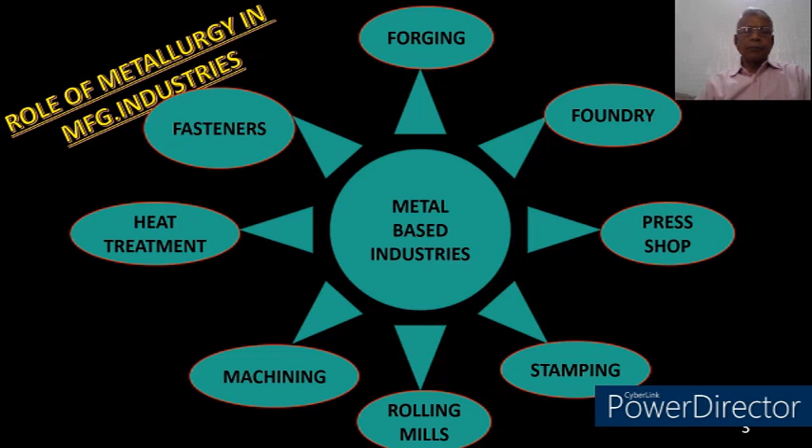But generally, these are the basic industries which are metal based and where metal is being used for manufacturing any product. So while running this type of business or industry, what problems or issues does the owner, GM, or plant head face day-to-day? I will give you a glimpse of that.

First one is low production. These are the various issues faced by any organization in general: low production, administrative and others like legal issues, union issues and all those things. Then high internal rejections, then parts failure at user's end, customer complaints, high production cost, quality issues, and poor customer base. So these are the various problems or issues in general in all metal-based industries, being faced by most plant heads, owners or GMs of a plant while running that particular plant.

So out of this, I have selected a few where metallurgy plays a greater role, because my title is Role of Metallurgy in Manufacturing Industry. So let's see what are those.

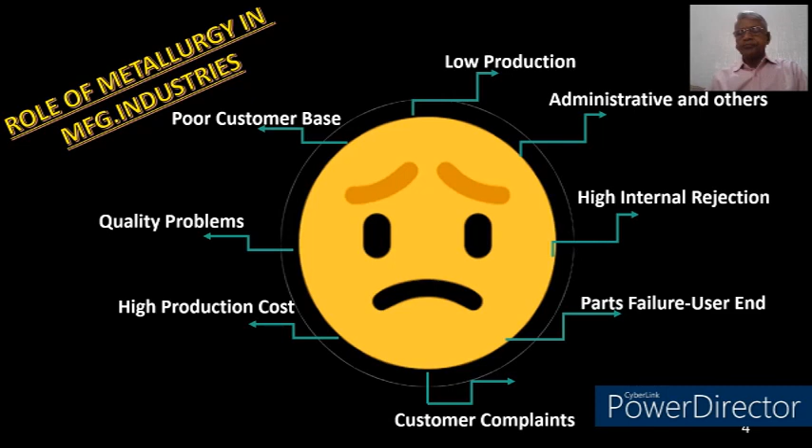One is customer complaint, high production cost, quality problems, and part failure at user's end.

You may ask, what is the difference between a complaint from the customer and a complaint from the end user? So let me differentiate this.

Suppose you are in a forging plant or a foundry plant, and you are supplying your final product, like forging, to your immediate customer, like a four-wheeler unit, tractor manufacturing unit, or two-wheeler unit. So that becomes your immediate customer. But the end user is the one who is using your part, like a farmer in case of a tractor, a passenger for a passenger car, or a motorcycle rider for a motorcycle. So all these are end users.

So this I have differentiated: customer complaint is from your immediate customer, and part failure at user's end is from the one who uses the total assembly where your part is also assembled. So coming back to the point: customer complaint, high production cost, quality problems, and part failure. These are the various areas where metallurgy plays a bigger role. Let's see how.

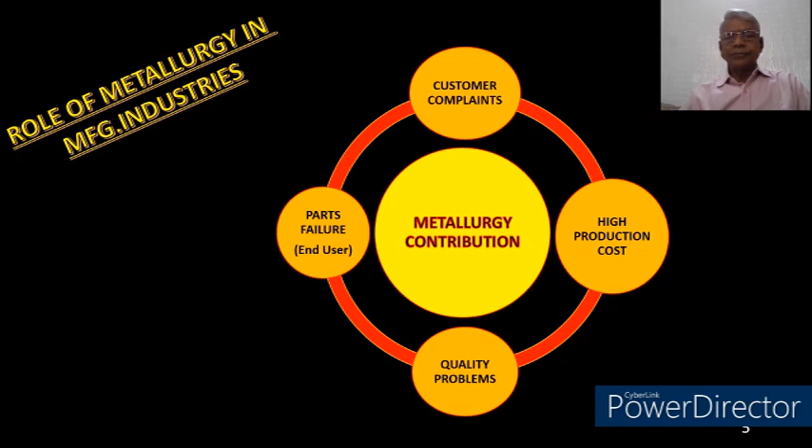First of all, customer complaints. Customer complaints are generally of two types: dimensional and metallurgical. I am not going to touch upon the dimensional; I will be touching only on metallurgical, because my topic is related to metallurgy only. So I will deal with this only.

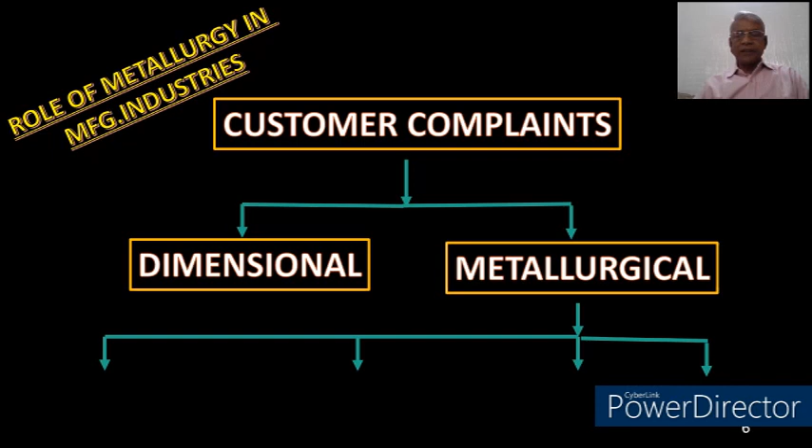So what are the various customer complaints related to metallurgy? Let's see: chemical composition, mechanical properties, microstructure, and breakage.

In general, the customer complains about any mix-up at their end regarding whatever you have supplied. There could be a mix-up between EN8 or maybe carburizing grade of steel. So that is a general customer complaint which comes from the customer.

Then mechanical properties, like hardness, tensile strength, or impact properties if specified. If there is something wrong with whatever you have supplied, then the customer complaint comes.

Then microstructure: if your heat treatment is not proper, if your hardening and tempering is not proper, you may get some mixed structure, or instead of hardened-tempered, you get some normalized structure. So that type of problem in microstructure is basically because of heat treatment problems.

And the last one is breakage. In case of breakage, wherever you are supplying your part, if it goes to the assembly shop and fails there, that becomes a breakage at your immediate customer's end. So these are the various issues which come from your customer.

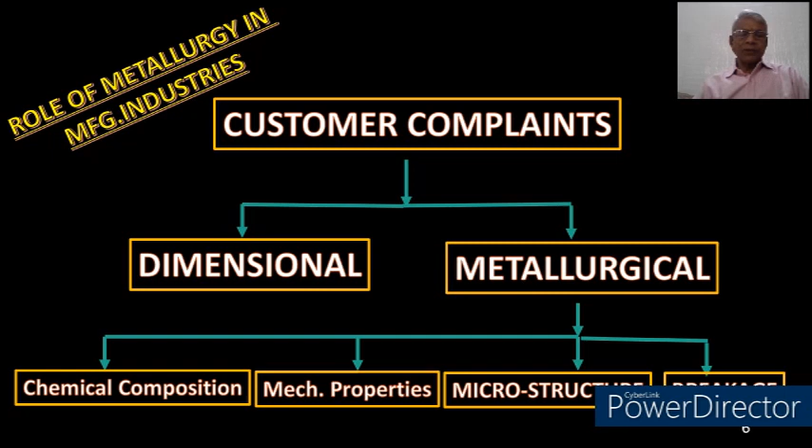So how does metallurgy contribute?

So, customer complaint. What are the solutions? The first and foremost solution is your raw material sourcing from the prime source or prime producers. This is one of the basic reasons. See, if you control your initial input, then I can assure you that 75% of your product will be okay as far as final product quality is concerned.

Of course, you have to maintain process parameters, but this is one of the prime reasons where failures occur, where you cannot achieve the desired property after doing all heat treatment and everything, but you lack somewhere. And there is a customer complaint to you that this product is not having a good microstructure or good hardness or anything related to metallurgy. So this you have to maintain. You have to buy material from prime producers.

Suppose I am taking the case of a forging industry, because I generally belong to forging as well as tractor industry. So I'll give examples from forging and tractor based industries. In that particular case, if you have taken billets or bars from a trader or somewhere, there could be a chance of mix-up because they don't keep their material with proper heat identified or even grade identified. So all those problems are there if you are buying from a trader. So you must buy from a prime source, prime steel producers.

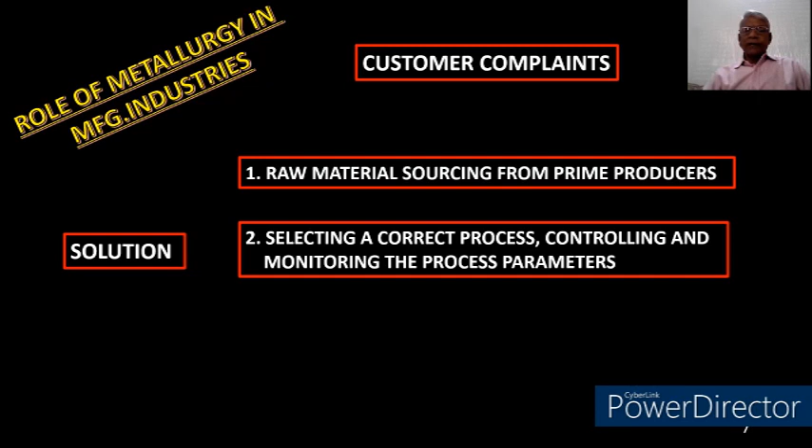Then controlling that particular process's parameters and also monitoring the process parameters. So these things are required while you are processing the material. After selecting the correct raw material, when you process it, these things have to be maintained.

Then the third is verifying the final product parameters before dispatch. Whatever quantity you are dispatching to your immediate customer, you must verify before dispatch that whatever you are sending is okay or not. For that, a quality audit is performed. Out of some lot, you take 5, 10 pieces or maybe 5%, 10% of pieces, check for hardness, check 1 or 2 pieces for micro and all those things, just to verify that your final product is okay or not.

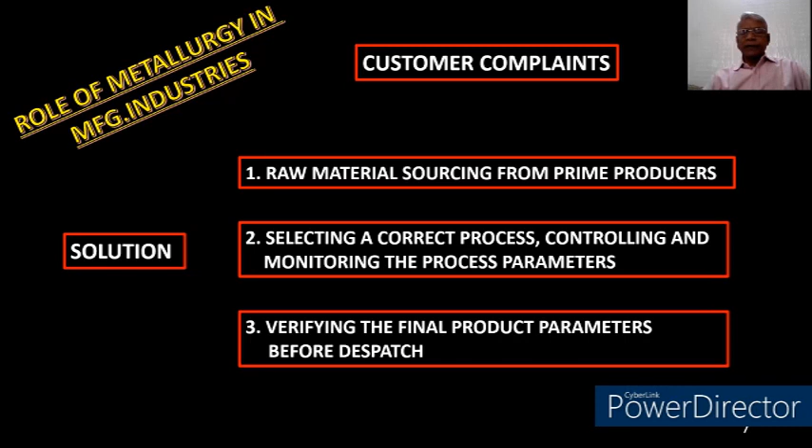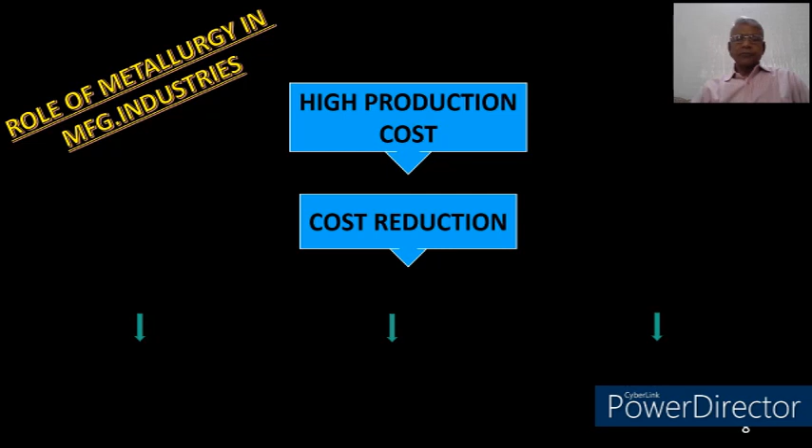So if you maintain these things, I am sure that you will minimize your customer complaints. This is one of the solutions where metallurgy plays a great role. Now I come to the second point. That point is high production cost. So how does metallurgy help in cost reduction? First of all, process modification. By modifying a process, you can also reduce the total overall cost.

For example, there are cases where people were using carburizing, but without compromising on the final property, they have shifted to induction hardening. Carburizing, maybe pack carburizing, any carburizing generally takes 10 to 12 hours to attain a particular depth, while in the case of induction hardening, it takes only a few minutes to get that particular case depth. And the production is very fast. Within an hour you can produce thousands of components, whereas in this case the quantity is very limited and the process cycle is very long. So by using this, you can reduce the overall cost of your product.

Then the other example could be forgings to PM parts. These PM parts means powder metallurgy parts, also called sintered parts. These are becoming very popular nowadays, because in forging, once you load the die, you produce hardly 3 to 4,000 components in a particular die run, depending upon the part shape and conditions.

Okay, but in case of powder metallurgy, you produce the finished good in almost finished condition, and the quantity goes to around 50,000, 60,000, maybe in some cases. If the job is small, it can go up to lakhs in one die run. Okay. So that is the advantage of going for it, but you have to confirm that the part parameters or product qualities are matching with forging, whatever is required by your end customers. Okay, that has to be confirmed.

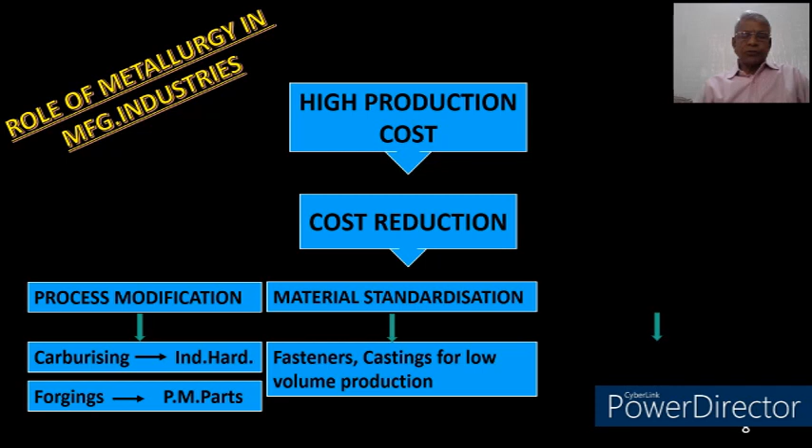So in that particular case, some of the cases are like fasteners. In one of the tractor manufacturing industries, this particular project was taken, wherein all the fasteners information was collected, and they were trying to commonalize, whether in terms of material grade or in terms of dimensional parameters. By adjusting 1 or 2 parameters, they could commonalize most of the fasteners, thereby reducing the procurement cost. Okay, so that also helps in reducing cost.

Similarly, for castings also, where the overall quantity requirement is very less, maybe you are producing a product, maybe 10 pieces or 100 pieces in 5 or 6 months. So quantity is very less, and for that you will need castings of different grades, very small quantity. So in that case, you can commonalize one casting. Maybe grey iron casting can be replaced with SG iron, though it will be slightly costly. But if you go as far as overall procurement cost, maybe it will be cheaper also.

So it will reduce, first of all, your inventory problem also, keeping different grades at different places, wherein you can keep one grade at one place only. So overall, there will be a cost saving if you standardize a material. Okay. Then the third comes material substitution. If you substitute a material, that also will reduce your overall production cost.

For example, from SAE 8620 to 20MnCr5. This was done by most of the automotive industries earlier. They were using 8620, which has nickel, moly, and chromium. Now they shifted to 20MnCr, which has only chromium as alloying element. So this becomes cheaper as compared to 8620, though the final product parameters or product quality remain the same, whether it is hardness, whether it is case depth and everything, that remains same.

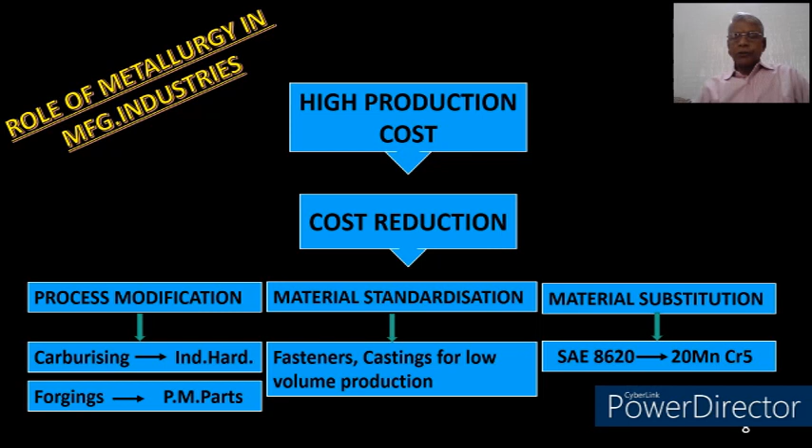But the raw material cost from 8620 to this is quite less. Okay, so in that case, you also reduce the overall cost. So by substituting a material, you can reduce the cost also. Then comes quality. In quality, the overall quality, whatever you are supplying to your immediate customer, how it has to be maintained and where metallurgy contributes.

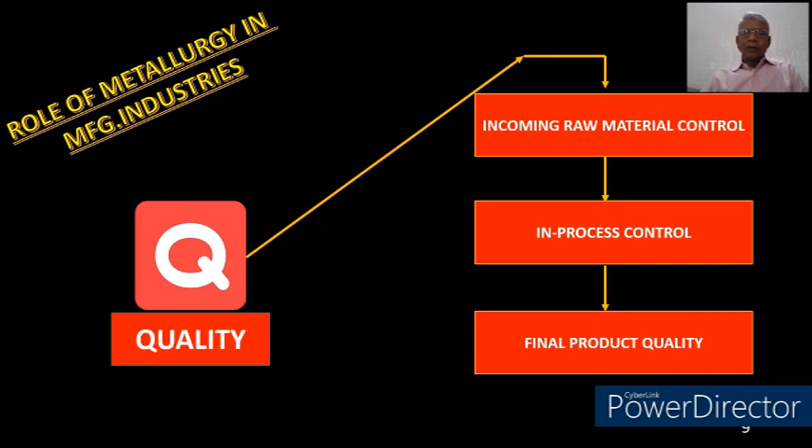Like in the beginning I told you, incoming raw material control is very much required. Okay. Then in-process control, and the last one is final product quality. If I go one by one, how you can maintain the quality, then let's go for incoming raw material. I'll talk about forging. So in case of forging, these are the various parameters which need to be checked at the initial stage when you are receiving a raw material: chemistry or grade of the steel, internal soundness, inclusion rating, grain size, forgeability, geometry, hardenability, step down test, dimensions and shape.

So these things are required when you receive a material from a standard supplier. This is what I am telling, that if you buy this material from a reputed source, a standard source, these problems will be less as compared to buying a raw material from a trader. Okay. So try to avoid raw material from traders or any unknown sources, because you will face a lot of problems while processing that particular material and you will not maintain the quality required.

Now the second is in-process control. In in-process control, again I am going with reference to this forging industry. Raw material cutting: here also you have to control feeding speed, raw material cutting speed. Okay, then you have to control the sizes also; sometimes different grades of material are of the same size. Okay, so here also during raw material cutting, you have to identify the material so that there is no mix-up at the cutting stage.

Okay, so this control is also required. In the forging operation, again, the forging heating temperature of the billets, then the forging operation itself, how many strokes are to be made, that has to be checked, along with the particular dies and everything. Die shapes, die cavities and everything has to be maintained in the forging operation also.

And when it comes to the final product after forging, we have to check the forging defects also: laps, dents and all those things, or cracks. So those things need to be controlled during the forging operation. So this is process control during forging.

And again in heat treatment, basically three things: what temperature you are heating it to, what heat treatment you are giving at what temperature, whatever the soaking time is depending upon the part thickness, and then how you are cooling the object, whether it is normalizing, annealing, or even surface hardening treatment like carburizing or induction hardening. So all these process parameters are required to be controlled during processing of that particular part.

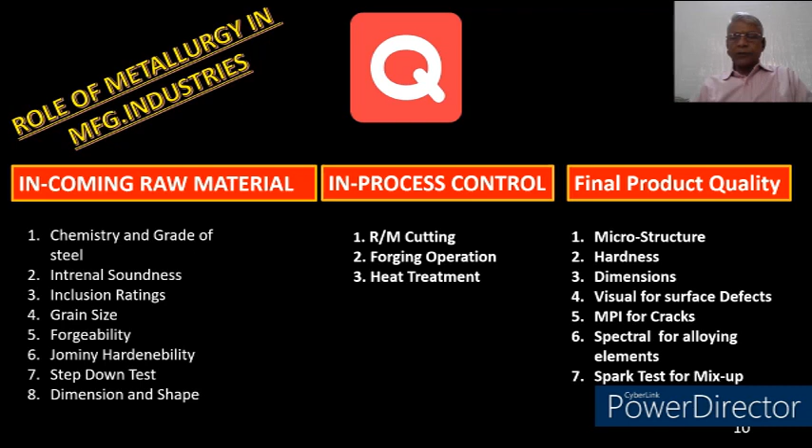Then I go to the third, that is final product quality, meaning whatever has been done, how you control your final product quality. This is again an example from forging. You check a few pieces of the lot prior to dispatch. Microstructure, one or two pieces you check as a sample. Hardness you can check 5 to 10% because it's non-destructive. Dimensions also you can check 5 to 10%.

Visual inspection for your surface defects, whether cracks or forging defects are there or not. Or MPI for surface and subsurface cracks. Nowadays this is very common for all forgings which are hardened and tempered, and even in finished products MPI is done for cracks. Then spectral testing and spark testing are done. Spectral is for alloying elements.

In that case, there is pedestal-type spectral testing, where you take 5 or 10 pieces out of the lot to be dispatched and check for alloying elements, whether it is alloy steel or plain carbon steel. By spark testing you can also check lot mix-up. If there is a low carbon with high carbon mix-up, you can verify that with a spark test. This is just before your final dispatch, so it's also called a quality audit, where you audit the lot before it is dispatched.

So if you maintain these things, I'm sure the quality of your product will definitely be maintained, and you will have fewer problems in the quality of the product. Okay.

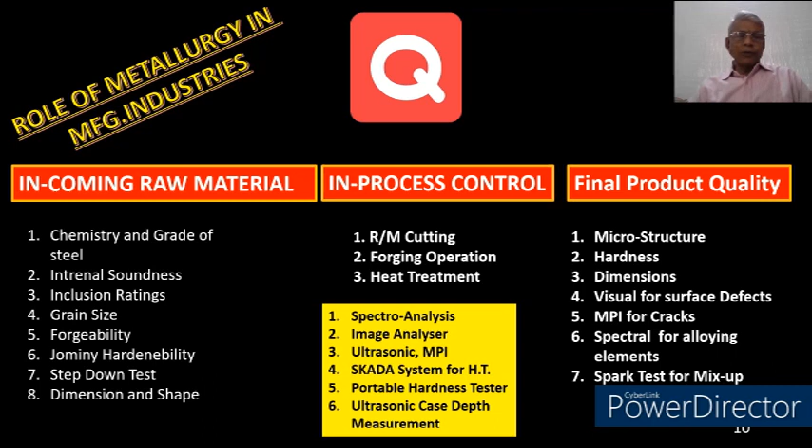These are some of the things nowadays that are very useful for metallurgical analysis, like the spectrometer. It is for chemical analysis, very fast and accurate. Image analyzers for inclusion rating, grain size, microstructure and all those things. Nowadays people use image analyzers because they give a quantitative figure. In our days, we used to check it and it was a qualitative analysis.

But now, because of recent developments and software, you can quantify it, and there won't be any confusion between a sulfide and a silicate inclusion, which was there earlier. It was very difficult to identify a sulfide and a silicate inclusion in steel. But nowadays, with an image analyzer, you can differentiate them and get the quantification also. Earlier, we used to compare with the standard JK charts.

Now you come to ultrasonics. These are also available. Ultrasonics, again, is all NDT, and nowadays so many instruments are coming, even ultrasonically based hardness testers. So ultrasonic crack detectors as well as hardness testers have come up, very useful portable hardness testers. And MPI, as I discussed here.

Then SCADA systems for heat treatment. Portable hardness testers, again ultrasonically based. And there are Leeb hardness testers also, impact-type hardness testers, which are also portable and non-destructive. Then nowadays ultrasonic case depth measurement has also come up. You don't have to cut the piece to check the case depth; you can measure it without destroying the piece.

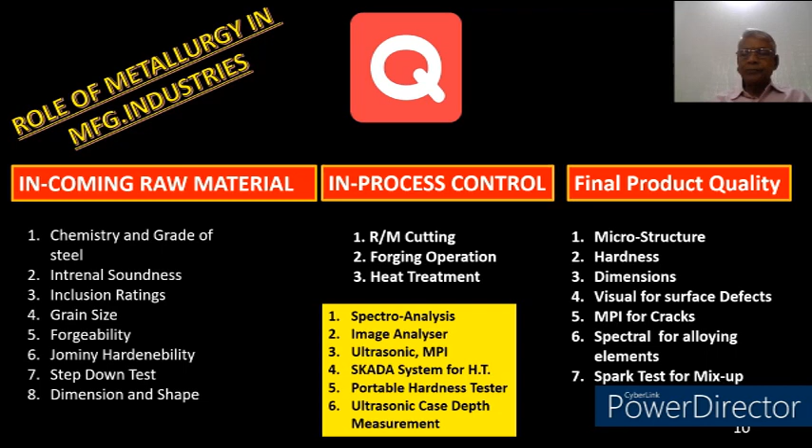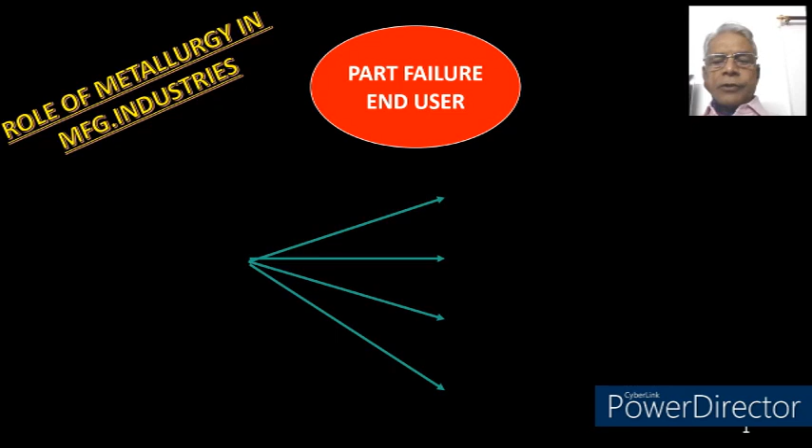Now coming back to the fourth point, that is part failure at end users or at user end. So where metallurgy can contribute. So let us see. First of all, what are the possible reasons of part failures at user end? It could be design related. Maybe the design is not correct. Fillet radius, fitment errors, and all those things are there. So in that case, there could be a design error.

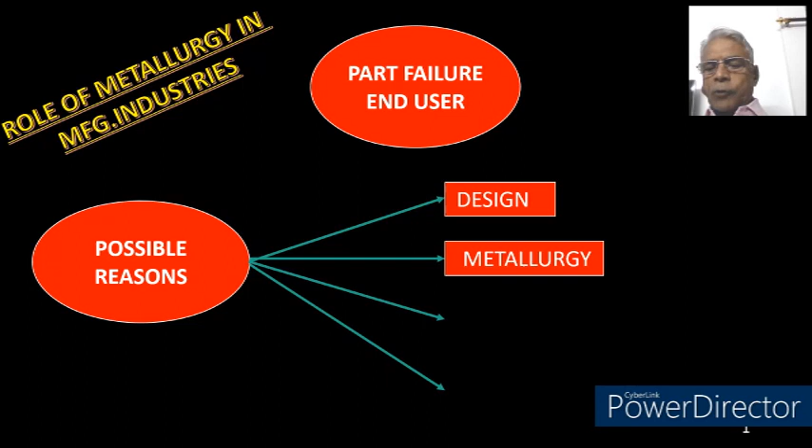Then metallurgy, again, all those metallurgical parameters like selection of material, mechanical properties, microstructures, all these things may not be up to the requirement. Okay. Third is assembly fault. During assembly, there could be a misalignment of components, or there could be over tightening of studs and nuts and bolts. That could also cause a failure in field.

And the last one is service abuse. It is not being used for the particular purpose it has been made for; it has been overused or overstressed. Like you take the case of tractor, it's made for field application, but people are using it as a transport medium also, with a lot of overloading on the tractor itself, on their trolleys and other things. So that causes an overloading on the entire system, and it may result in a failure during service. So these are the possible reasons where design, metallurgy, assembly fault, or service abuse can lead to a part failure at the user end.

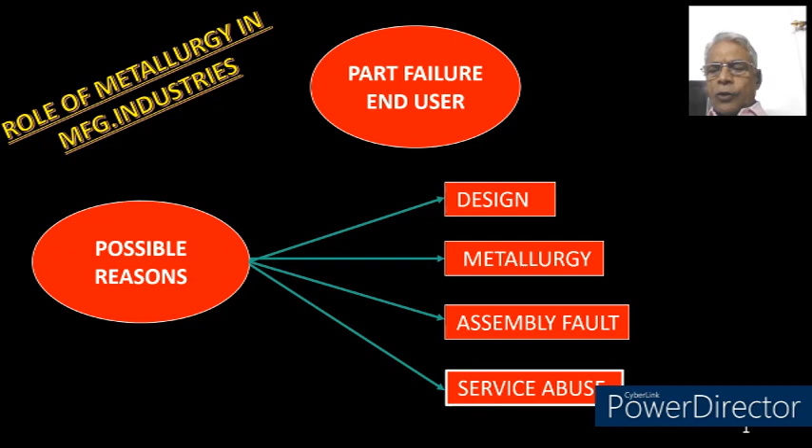Now, what can a metallurgist do? See, part failures at user's end. Steps in metallurgical failure analysis. So first of all, why is this failure analysis required? Why? The answer is failures which occur in service, when analyzed, bring out the deficiencies in the system, be it in the manufacturing stage or selection of materials or design criteria or usage practice, etc. So adequate remedial measures are then taken to prevent or minimize the recurrence of such failures.

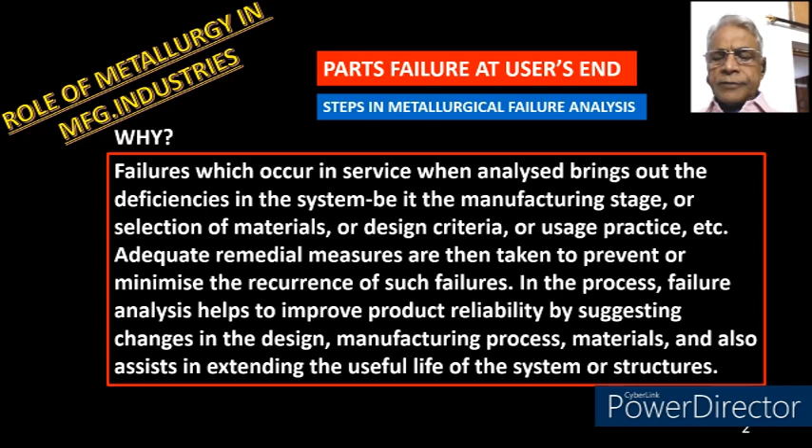In this process, failure analysis helps to improve product reliability by suggesting changes in the design, manufacturing process, materials, and also assists in extending the useful life of system or structure. So this is why failure analysis is required, because it brings out the reason and it suggests whether there should be a change in the design or manufacturing process or material selection, or if they are not using as per their useful life, maybe because of service abuse. So all these things are to be considered. Okay. So let's move further.

Steps in metallurgical failure analysis. What are those steps? First of all, removal of failed parts from the assembly. This is a very important step in failure analysis: whatever parts are to be removed from the assembly have to be removed very carefully. You should not hammer it out or press it out or even scratch it. Otherwise, it will give a different indication on the failed parts. So it has to be removed very carefully from the assembly.

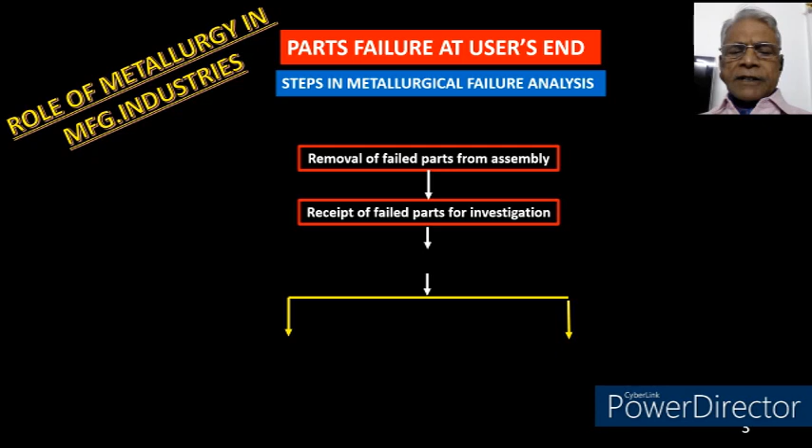Then receipt of the failed parts for investigation. Whatever parts have failed have to go to the investigation laboratory where a metallurgist can analyze the failure. And not only the failed parts, there could be some small parts also, some chips, something else related to the failure that also has to be given to the laboratory. So the failed part along with chips or smaller parts which have also failed, so a metallurgist can correlate why these failures have occurred. So everything has to be given to the laboratory for investigation.

Then comes collection of background information. This is also required. Where the part has failed, what was the condition under which it failed. Suppose you take a case of tractor. It goes to various areas, north, south, east, west, and the soil conditions in different areas are different. Somewhere it is hard, somewhere it is soft. So those conditions are to be mentioned. Then climatic conditions also, whether it failed in rainy season, winter season, summer season. All this background information is to be given to the lab for investigation.

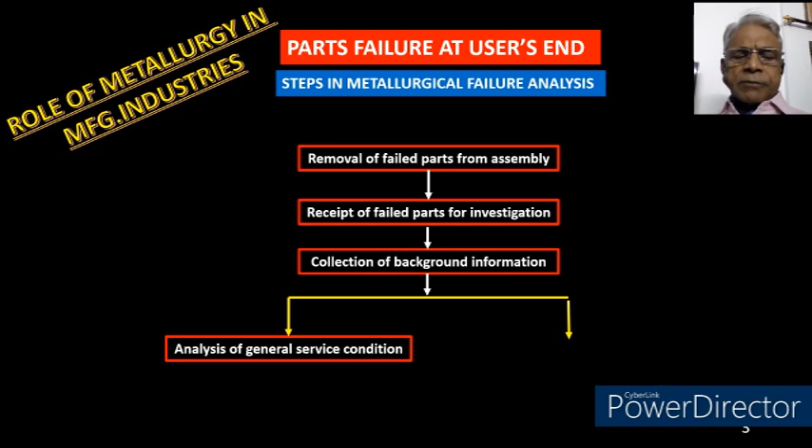Then a metallurgist analyzes the general service condition under which it has failed. Whether it has been overused or there is service abuse, or even the background information like climate conditions, soil conditions. So many things are there. Even in that case, suppose a bearing has failed, one has to see the condition of the bearings also, which have failed.

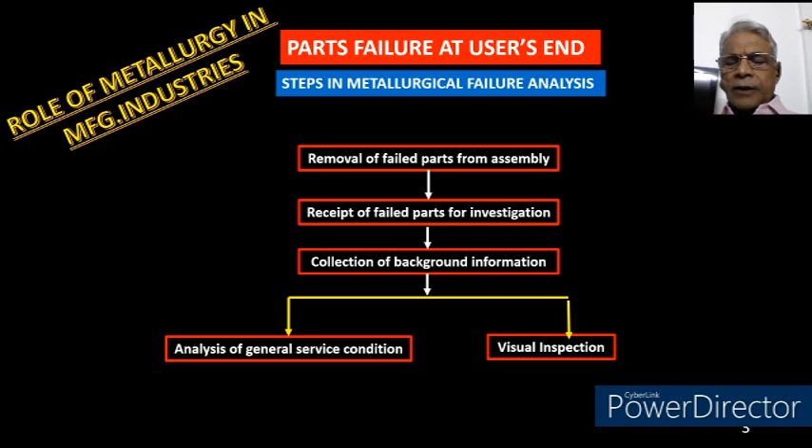Then the other thing is visual inspection. The failed part has to be checked visually whether it is showing any crack, or any burning mark or black mark, or small failures, small cracks. Like gears, sometimes small cracks have developed on the teeth. So everything has to be looked at very carefully, what you are physically seeing on the particular failed piece. Then what else?

Visual examination continues. Then we go for non-destructive testing. If the failed part is to be examined for surface cracks or subsurface cracks, or by ultrasonic testing for internal defects, it has to go for non-destructive examination.

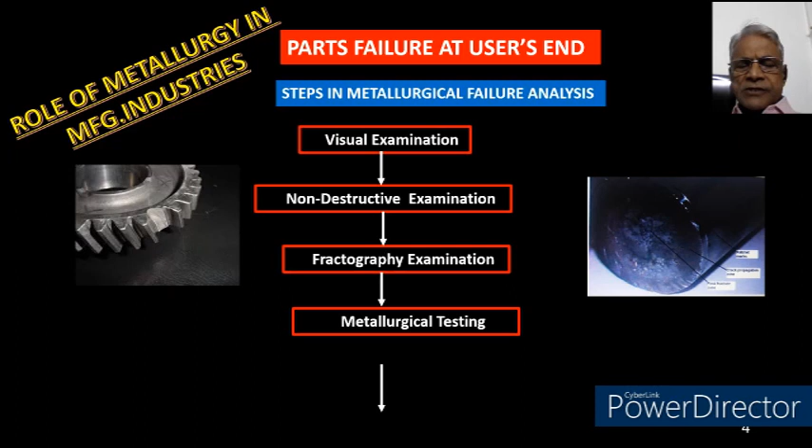Metallurgical tests are required, which can be done by portable instruments, modern instruments, or destructive testing. So all these tests are to be performed: chemical analysis, mechanical testing, and metallographic examination. These are to be carried out on the part which has failed.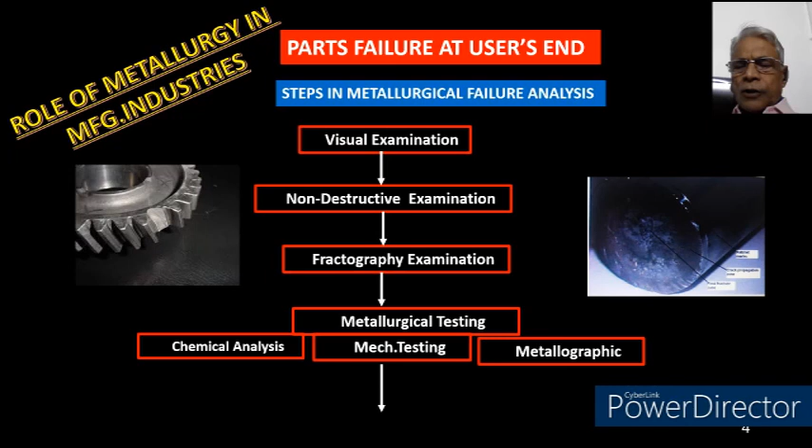Then you go for analysis after collecting all the information, background information, service conditions, and then fractography examination, everything, including magnetic particle inspection and non-destructive testing. Then you analyze the entire scenario.

Like a murder mystery, all the evidence is collected and then analyzed and sequenced. What could have been the sequence of the failure? How it started and how it propagated. Whatever failure has occurred, how the crack developed, how it propagated, and how it finally fractured. All these things are analyzed, and then one has to reach a final conclusion.

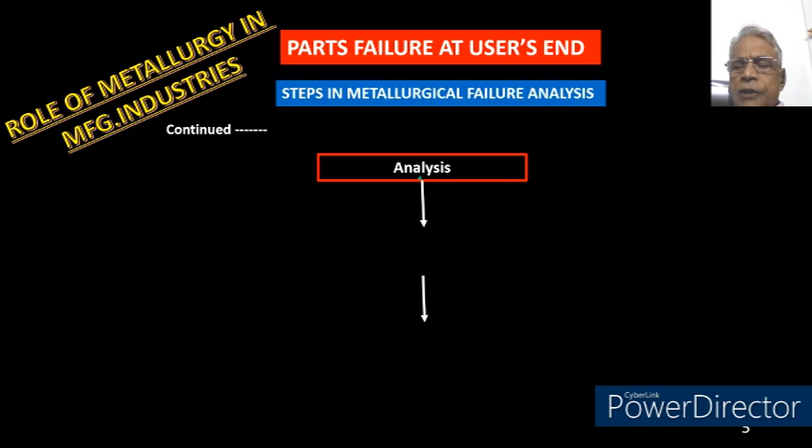What could be the possible reason? Whether it is overstress in service, or service abuse, or there was some initial crack, or the raw material was not good, or the heat treatment was not good, and because of that the microstructure was not good. So many things are there.

One has to conclude what could be the cause of the failure, and after concluding that, a recommendation is given, whether for design improvement, material selection, or process changes. All these things are given in the report, and finally the report is issued to the concerned department.

The failure analysis report is issued not only to the concerned department but also to all responsible departments. If there is a recommendation for design changes, it goes to design. If there is a recommendation for metallurgical improvement or material selection, it goes there. If there is a requirement for process improvement, it goes to the manufacturing area also.

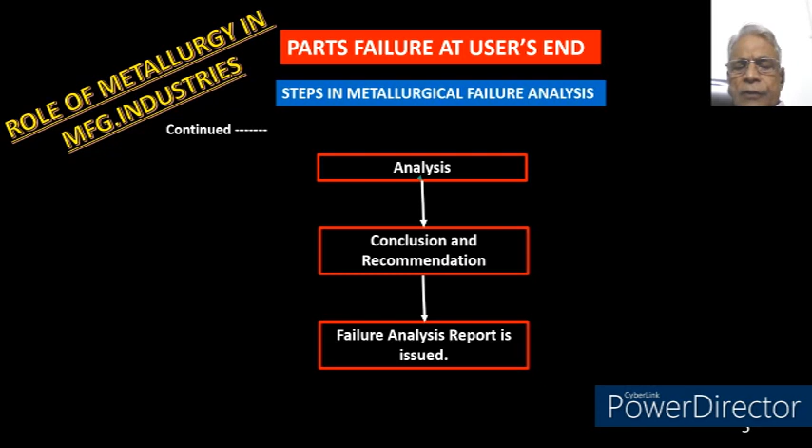So all these things are given in the failure analysis report, and accordingly actions are taken so that the part which failed should not fail again in future. Whatever part or tractor you supply to your customer should run perfectly without any failure in between. This is how complete failure analysis is done for a part that has failed in service.

Now, to summarize, I'm focusing only on areas where metallurgy contributes. In part development, you go for material selection—whether the material selected for a particular part is okay, whether it meets the design requirement, whether the required strength is achieved, whether through heat treatment or surface treatment like case carburizing or induction hardening.

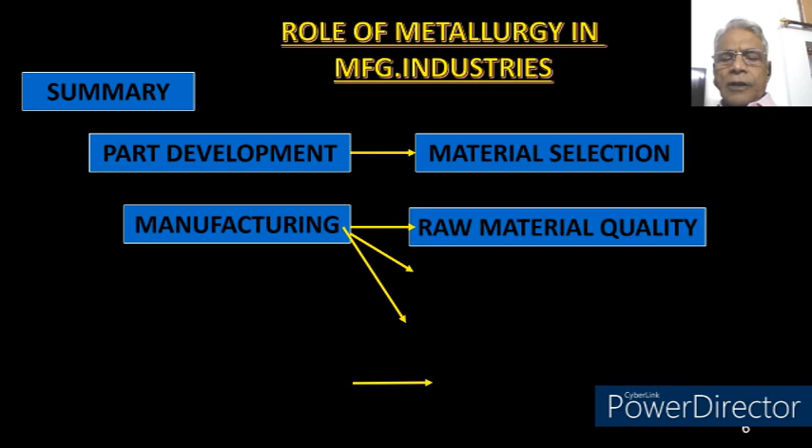These are to be seen by the metallurgist basically. Then in manufacturing, what are the areas? First, raw material quality, then the heat treatment cycle—whether it was given properly as per requirement, whether it gives the final properties, and then metallurgical testing. These are the areas in manufacturing where metallurgy contributes.

Now coming to the final product—metallurgy plays a good role here too, because before dispatch the part has to go for a quality audit, which I explained earlier. So in the complete development of a part, these are the steps: development, manufacturing, and final product. In all these areas metallurgy plays a big role—material selection, raw material quality, heat treatment cycle, metallurgical testing, and quality audit. All these are contributed by the metallurgy department.

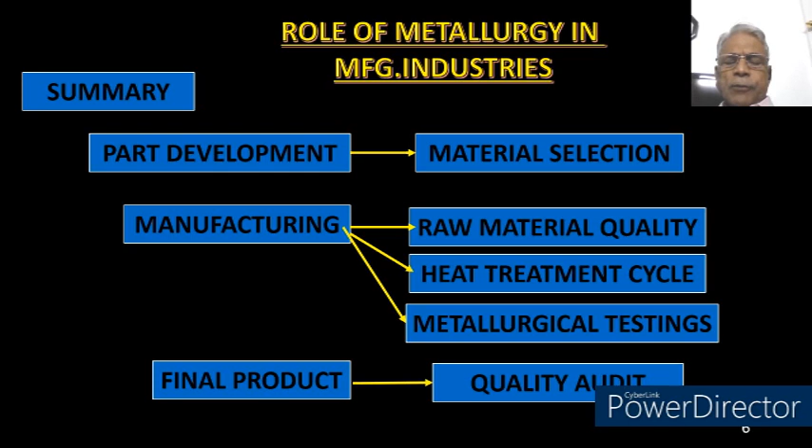So this was my topic basically, where I dealt with the role of metallurgy in any manufacturing industry. I took the example of a tractor and a forging industry, but these basic things apply to every process and industry, whether sheet metal based, machine shop, casting foundry, CNC, fasteners, or heat treatment. In all these cases you go through these three steps where metallurgy contribution is highly expected and metallurgy has to perform very well.

Otherwise, there could be a failure. So my request to all the industrialists involved in manufacturing of various components, because of so many manufacturing methods, is that they must consider the importance of metallurgy in material selection, manufacturing, and final production.

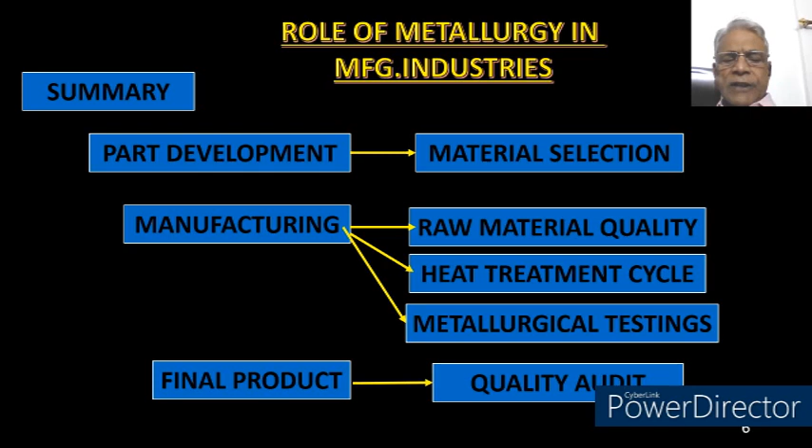So, how was the presentation? Of course, it was liked by most of the participants. Hope you would have also liked it.